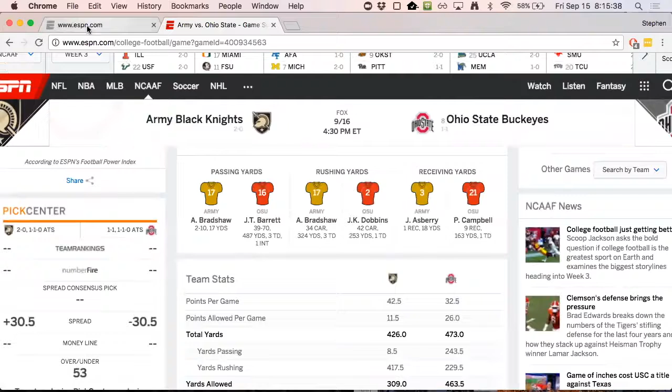Okay, so I want to make an observation. I get my ESPN updates so that I can be informed enough about football to engage everyone in social conversation.

But something struck me about the stats for the next two games. If you look at it, if we pick Army and take a look at the records, 2-0 and 1-1, and we look at points per game, total yards, and yards allowed, and we do the same thing with Ohio State, on paper both of these teams can be considered significantly better in terms of these stats.

So does anyone honestly believe these stats? Apparently Vegas doesn't, because we've got almost a 31-point spread against Army. The collective wisdom of football, people who bet on football, is strongly in favor of the Buckeyes. Does anyone actually believe these stats? Probably not, but they're real.

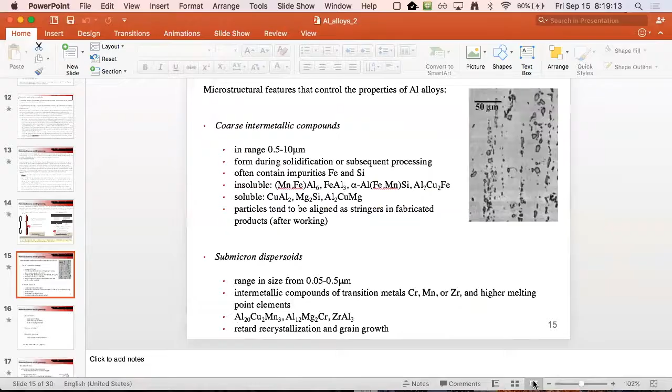Mechanical twinning, deformation twinning. Does high stacking fault energy or low stacking fault energy twin more readily? Is aluminum a high stacking fault or low stacking fault material? High. It's high stacking fault, right? We never see deformation twins.

Oh, okay, so I need to swap displays. Where's my pointer? Why my wife is calling me during lecture, I don't know.

So aluminum is a high stacking fault material, right? We never see deformation twins in bulk aluminum. Now, there was somebody who was an expert in mechanical behavior, a very well-known scientist, who did a lot of TEM observations of aluminum. In the thin foil, aluminum twins readily—completely different situation than in the bulk. They developed a whole theory of dynamic recrystallization by twinning in aluminum alloys. It was very sound based on the observations, but completely out of the ballpark based on a more holistic understanding of the deformation behavior of FCC metals.

It's very easy to fall into those sorts of traps—that's sort of wrong thinking without having enough of a bigger picture. Okay, so that's enough of my cautionary tale.

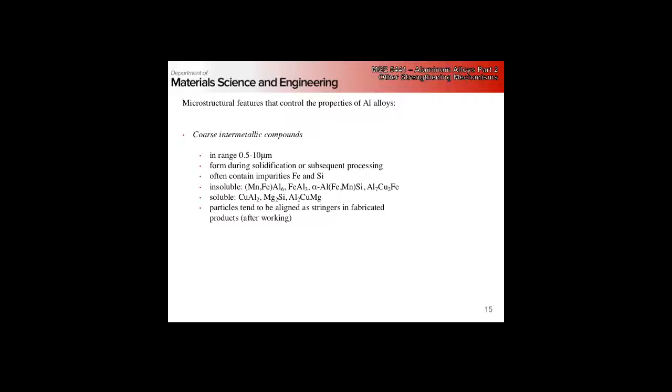So we started on Wednesday looking at some of the microstructural features that control the properties of aluminum alloys. The first microstructural feature was the presence of coarse intermetallic compounds, and for the purposes of the upcoming discussion we'll consider these in the range of 0.5 micron to 10 microns. They form during solidification and processing, and tend to align in stringers as a result of mechanical fibering—during deformation, if we have particles at grain boundaries and equiax grains that we then pancake out.

We end up with long stringers of these particles, and we can generally break them into two classes: insoluble, which don't have a clear solvus on our phase diagram and we have to take them up to the liquid to dissolve them, and soluble which will dissolve back into the matrix at elevated temperatures in the solid state. So that's the first microstructural feature to consider.

Smaller submicron dispersoids of intermetallics—we'll lump this in the range from 50 nanometers to 0.5 micron. These are the particles that help us a lot with grain size; they tend to retard recrystallization and grain growth.

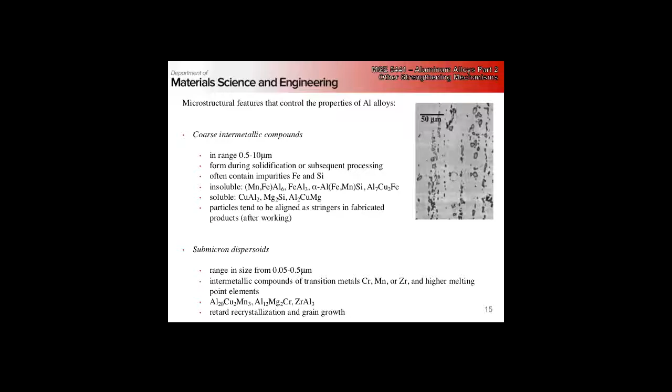Then fine precipitates—these are the nanometer scale particles that we spent a lot of time talking about in the age hardening section, and this is the basis of our high strength in age hardenable alloys.

The other things we want to consider are grain size and shape, and the dislocation substructure that develops during working or mechanical processing operations. For the rest of today, we want to consider the effect of these features on the properties of our alloys, and we're going to keep everything separate: the alloys that respond to heat treatment, otherwise age-hardening alloys, and the non-heat-treatable alloys, where we rely on all the other strengthening mechanisms we talked about this week: cold work, solid solution strengthening, grain boundary size. So what about coarse intermetallics?

The main effect is that they really don't affect the yield strength very much. They don't affect the ultimate tensile strength very much, but they do have a very marked effect on the ductility. These intermetallics are very brittle; they'll crack, and now we have a void in our material.

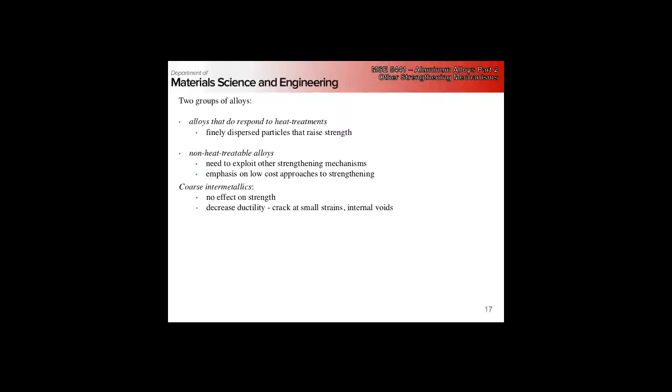Remember our working of the material: we tend to align the grains and get these stringer formations, and that gives us a strong anisotropy in the mechanical properties.

So that means whenever we report the properties of a cold worked alloy, we generally have to think about it in three directions: the first one is along the fiber length, the transverse direction, and then the short transverse direction, which is normal. So if we think about rolling, along the fiber length is the rolling direction.

Because we're taking these grains and smashing them out, these aren't just necessarily a stringer - these are sort of plate-like regions where you have a whole bunch of particles embedded. So it makes sense if we think about pulling along the rolling direction, pulling transverse to the rolling direction, and pulling along the normal direction.

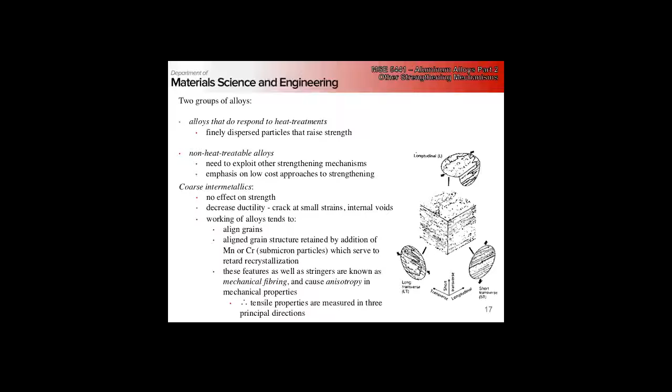The normal direction is what's called short transverse. Our properties tend to be greatest in the longitudinal direction and least in the short transverse, due to the fact that we're now pulling in an orthogonal direction to these stringers of intermetallics. Remember, force has to be the same through the thickness - if I'm pulling normal, I'm hitting much larger planes that have a much larger cross-sectional area than the intermetallics.

If we consider two alloys, a 7000 series and a 2000 series, and measure in the three directions, our ratio of strengths isn't all that anisotropic - you maybe get a couple percent reduction in strength between the short transverse and the rolling direction. But if we take a look at elongation or ductility, we have a huge difference - we lose ductility by more than a factor of 3 in some alloys, a factor of 2 in most alloys.

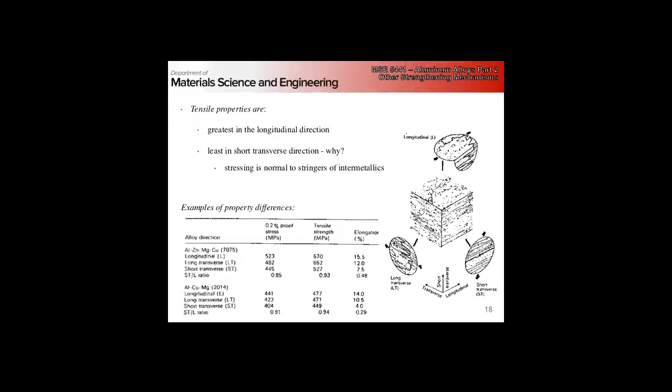Okay, so the other property we want to consider is the effective grain size. I had mentioned that the Hall-Petch coefficient for FCC metals is very low compared to BCC and HCP. Aluminum is particularly low, two orders of magnitude less than good steel alloys, for the Hall-Petch effect, right?

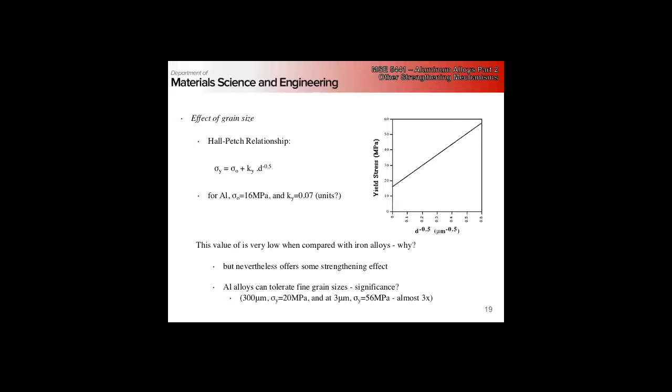Okay, so recovery and recrystallization. Very pure aluminum alloys will statically recrystallize at room temperature. If you take five-nine pure aluminum and cold work it to 95% strain, you'll completely destroy your grain structure and have huge pancake grains. Set it aside and come back a week later and you'll have beautiful, clean, equiaxed grains. So in pure aluminum, cold work is not an effective mechanism for raising the strength.

So just as a refresher, what's the difference? I have recovery and recrystallization. What's recovery? Annihilation of dislocations, but you're not changing your crystallographic structure.

Both recovery and recrystallization happen in two forms, static and dynamic. Static recovery happens under purely thermal processing. Dynamic recovery happens under mechanical loads, as you're deforming it, you're driving dislocations that interact with each other and annihilate. In terms of dynamic recovery, we have thermal and athermal effects, but that's a sidebar. Recrystallization, we also have static and dynamic recrystallization.

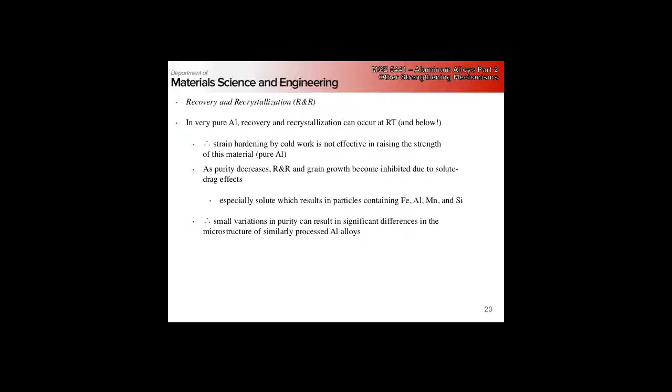Okay, so the next one on the list was toughness. Toughness is a huge one, because we use metals because we can dissipate a large amount of energy through plastic deformation. It means we fail things in a controlled manner. If our toughness gets low and we move from a ductile fracture to a brittle regime, then all of a sudden we're in trouble.

Remember when we first started talking about aluminum, I said, what are the reasons that we use aluminum? And I specifically pointed out that there isn't a bulk phase change in the temperatures that we're interested in. So that means we don't need to worry about a ductile to brittle transition. However, if we do something with our processing that reduces our toughness enough, that benefit goes away.

And tensile strength happens to be inversely proportional to toughness. Just as a quick reminder, tensile strength is resistance to failure by mechanical overload. Toughness, really here the fracture toughness, is the energy under the stress strain curve. And in the presence of flaws or other defects, this can drastically reduce the amount of energy that we absorb or dissipate.

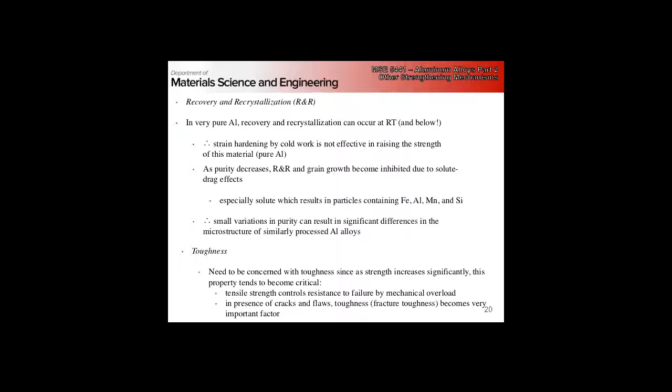So in aluminum alloys, we have ductile failure, which means that we get voids that nucleate and coalesce, and you get these fibrils. So now if we have a series of large intermetallics, notice that the crack path follows the largest defects, the largest particles in our structure here. So the distribution of particles is of prime importance.

So if we tend to have large linear arrays of large brittle intermetallics, that would be bad. What naturally happens when we roll our material? We get just that: large linear arrays of brittle intermetallics.

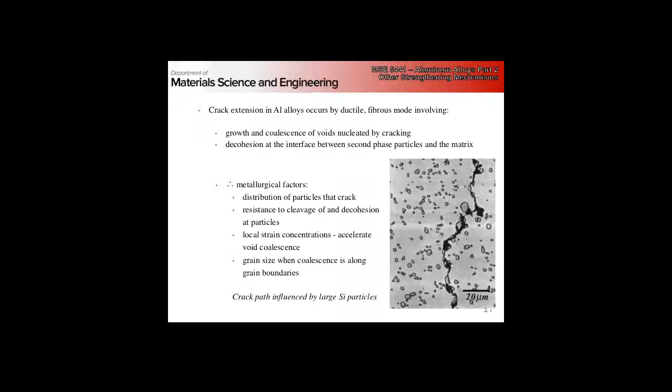So particles can cleave depending on the surface energy. We can have decohesion. This gives us very large local strain concentrations, which can then accelerate the void coalescence. And depending on the alloy, we can also zip along grain boundaries, especially in alloys that are subject to stress corrosion cracking, like aluminum-magnesium. If we have a large amount of grain boundary, a brittle grain boundary beta phase, especially in a hydrogen environment, it becomes even more brittle. Then we have a crack that just can zip along the intermetallic that's on the grain boundary, without much resistance.

Okay, so the first thing we want to do is try and reduce the level of iron and silicon.

So if we take a look up here, this is the fracture toughness of the same alloy, but with greater than 1% iron and silicon impurities, and here less than 0.5%. You can see a clear difference in performance based on small changes in the concentration of iron and silicon.

Silicon, we'll talk about this in the next lecture. We use alloys with a huge amount of silicon in them, but those are mostly casting alloys, and the silicon gives us really good flow properties. So they're in a different sort of group than the wrought alloys, and they tend to be used in different applications. Cast aluminum versus wrought aluminum.

Submicron particles, as I said before, these are the ones that suppress recrystallization and inhibit grain growth by pinning. Remember, the mechanism is the particles are on the grain boundary, and they have a lower surface energy than the grain boundary surface energy. So the boundary wants to stay right there, because now I've got aluminum and aluminum touching this low energy surface. Instead, if I move the particle off, now I have a higher energy grain boundary interface.

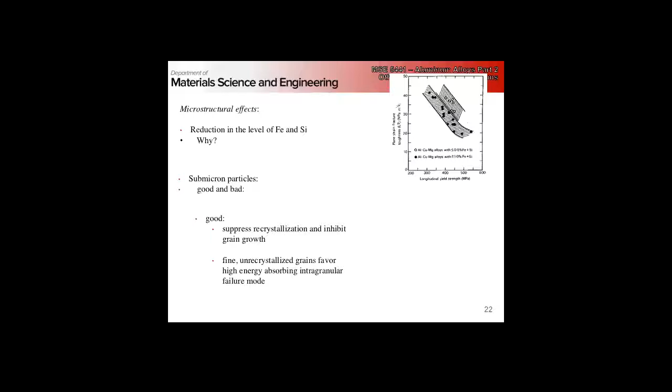The good about this is, again, we suppress recrystallization, and then these fine unrecrystallized grains, when they do fail, will favor intragranular as opposed to intergranular failure mode. So the cracks will cut across grains rather than going along the grain boundary. And so we can see here again, this is fracture toughness.

And we can see here that the fine elongated unrecrystallized grain, so the elongated pancake from deformation, we have a higher plane stress fracture toughness. If we recrystallize it, we lose a little bit, and then if we grow the grains out large, we greatly reduce that.

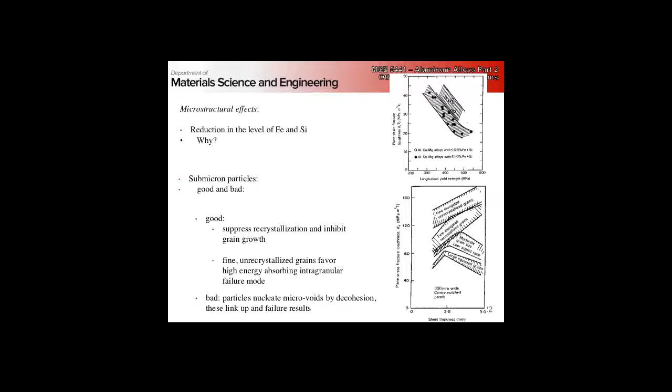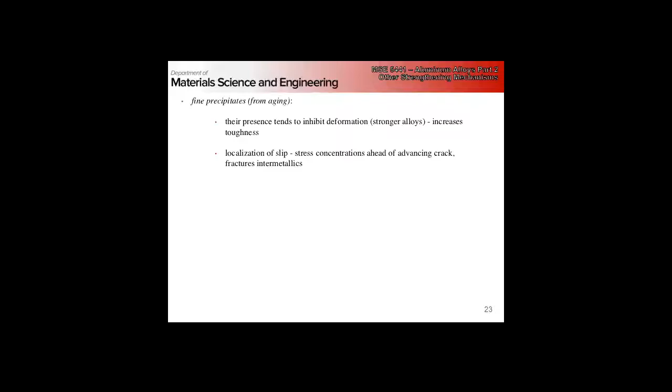Fine precipitates from aging, this is what we spent a lot of time talking about. We get very high strengths, strengthening effects, but we can also increase some toughness because we have a much more tortuous path. We don't have large things that can break and cause decohesion.

Okay, so that's fracture. Fatigue is sort of another story. Fracture is we just pull it till it breaks. Fatigue is we cycle back and forth.

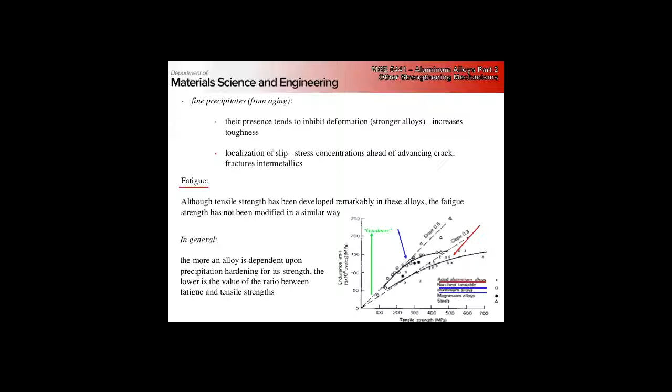So what makes fatigue different than fracture? Well, the cracks still nucleate at stress concentrations, tending to be from the surface or other internal voids. I should say fatigue cracks initiate at free surfaces, whether that's an internal free surface or an external free surface - it really doesn't matter much. Notches, corrosion pits, coarse slip bands. What's a slip band? Anyone familiar with the term?

It's different than a slip trace. A slip trace is just where things deform. A slip band is a region where the strain has been localized, so that as we go back and forth, we're sort of shearing back and forth on the same planes because we've gotten some sort of softening mechanism in there, such as we had a nice fine strengthening precipitates, but then we sheared them sufficiently that we reduced the cross-sectional area. Now they're not as effective strengtheners. And once a plane weakens a little bit, then we're going to keep going back and forth on the same thing.

And it's asymmetric. It's ratcheting - we go forward and come back when we reduce the load, but we don't necessarily always come back the same amount that we went forward. So the more we activate the slip band, the more we're softening and potentially destroying the structure inside.

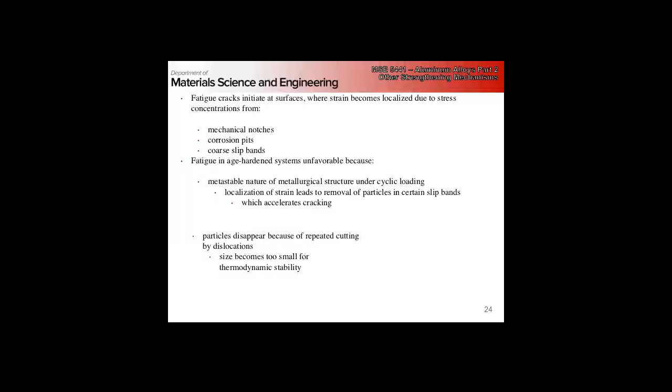It's also becoming cold worked, right? So it's losing toughness, losing ductility. But even with that, it's still significantly softer than the surrounding area, right?

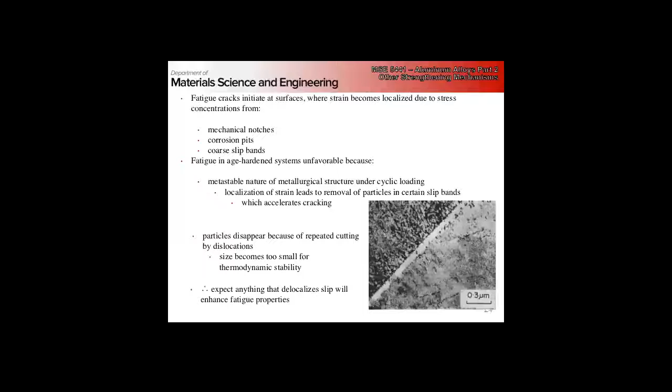So our strategy is, strain localization is bad. So the strategy to improve fatigue resistance is we want to do anything we can to try and delocalize slip. Okay? So, some slightly larger particles rather than just the strengthening ones.

The interesting thing is that impure alloys perform better than ones of high purity. This is aerospace alloy 2024, aluminum copper magnesium. The X designation is high purity. We see a marked decrease in the cycles to failure for a given cyclic stress amplitude as we make it more pure.

So we nucleate these manganese aluminum particles, which means we don't have a clear slip path, so we don't form slip bands.

But we can't make these so large that they become easy to fracture and destroy us the other way. If we make them too big, we reduce our properties again. There's a sweet spot. We want to delocalize the slip, but we don't want to introduce other paths for fracture. Okay?

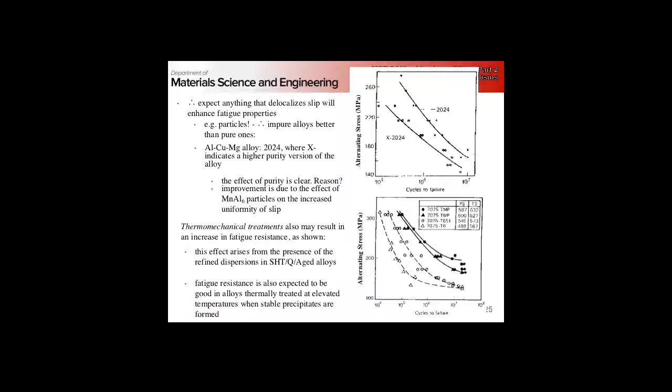But this is the same alloy, 7000 series, and we can see that operating under different thermomechanical conditions can give us a big change in the fatigue resistance. That's the big message here. This is not just a property of the composition, it's also strongly dependent on what we do to it.

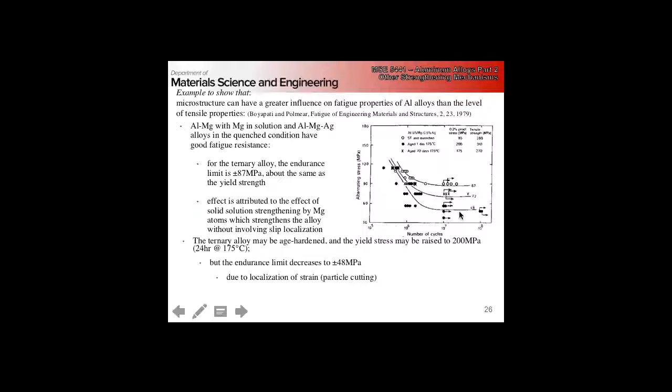So for an example of this: the aluminum magnesium silver alloy has an endurance limit of about 87 MPa. If we then age it, we reduce our endurance limit by almost a factor of 2, because now we've made bigger particles that we can cut due to particle shearing. And then if we continue to age them, if we overage them, it goes back up, because now we have big particles that aren't going to localize the slip anymore, since now we're going to loop around them. So it's all a matter of degrees here.